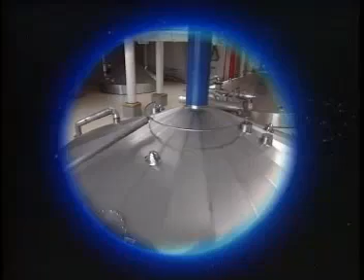Around the world, in countless demanding applications, users are discovering the benefits of peristaltic pumping. So what is peristalsis? It's an elegantly simple process designed for reliability by Mother Nature herself. In our own bodies, we use peristalsis to move food and drink through our throats and intestines.

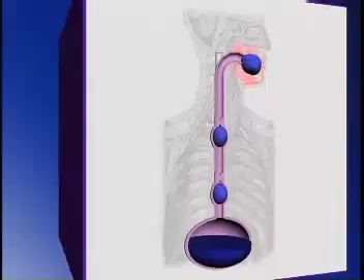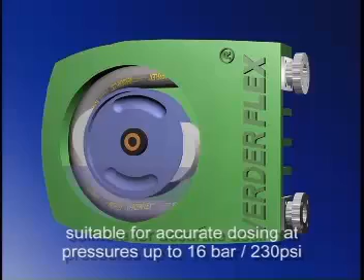Exactly the same process is used in Verderflex industrial hose pumps. An alternating wave of constriction and relaxation is used to force a slug of product along a smooth-walled flexible hose. The hose sits within the pump casing and is completely squeezed shut by the rotor or rotor shoes. This action moves the product along the hose at a constant rate of displacement without slip, making the pump suitable for accurate dosing applications and pressure ratings up to 16 bar or 230 pounds per square inch.

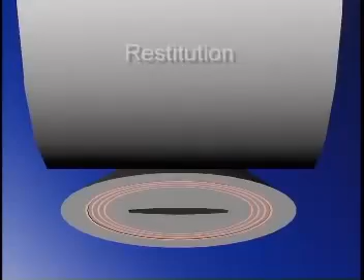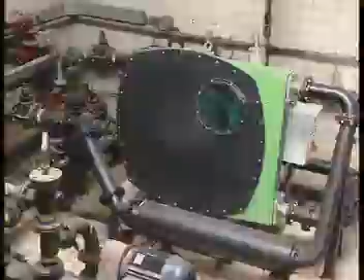After the shoe has passed, the hose returns to its original shape. This process is called restitution, and it produces an almost complete vacuum that draws the product into the hose. This approach makes a peristaltic pump ideally suited to pumping highly viscous products, liquids with high concentrations of solids, abrasive or highly corrosive and shear-sensitive products.

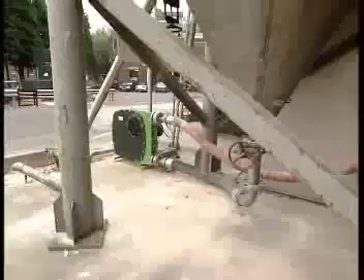The pump will self-prime and can even be run dry without damage. Applications often include deep lifts from vats or bund storage. In the event of a blockage in the pump, the direction of pumping can simply be reversed and the blockage cleared. One reason why we describe our pump as being a reliable problem-solving pump.

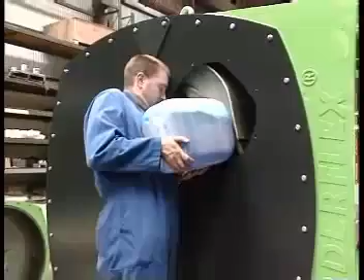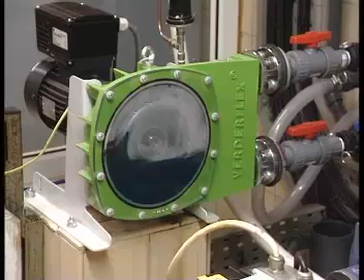The pump casing is partially filled with Verderlube lubricant, specially formulated to cool the pump and ensure long hose life. A major advantage of this design is that the Verderflex pump is fail-safe. Should product leak from the hose, it is still safely contained within the pump casing.

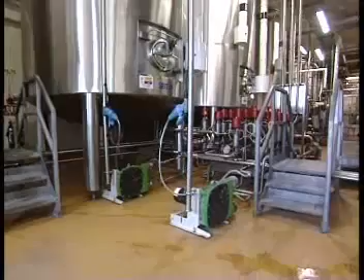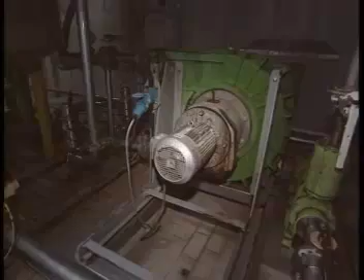Another advantage of the peristaltic principle are the low shear forces. This prevents damage to the product, and the gentle action even allows the pumping of live salmon parr in Norwegian fish farms. The volume of product pumped is determined by factors such as the bore size of the hose, the speed at which the pump is run, and the product's viscosity.

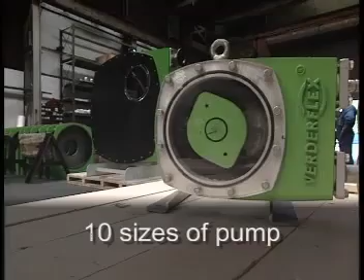The Verderflex range includes 10 sizes of pump, each one defined by the internal diameter of its hose. This ranges from 10 mm to 125 mm. Verder's largest peristaltic pump is the VF125 with a hose bore of 125 mm. When pumping water, this unit will deliver up to 80 cubic meters per hour or 350 US gallons per minute when running at a speed of 40 RPM.

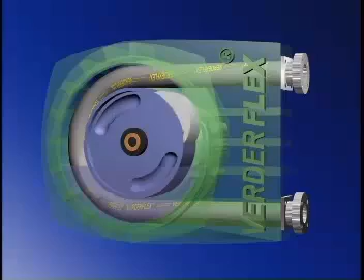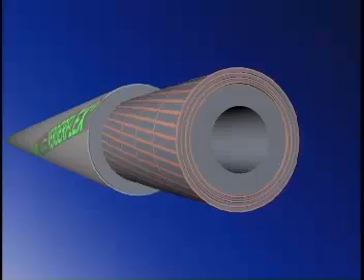Having looked at the operation of the Verderflex pump, you'll now understand the importance of the hose itself. Its design and construction has critical implications for the effective operation, life expectancy, and maintenance of the pump. Verderflex hoses are made up of 3 key elements: the liner, the fiber reinforcement layers, and the outer cover. Together, these key elements produce a hose with unique features that make a Verderflex pump the envy of the competition.

At the heart of the hose is the liner, specifically selected to suit the product being pumped. The external color-coded brand tape is different for each liner material, making identification easy. White indicates NR or natural rubber, ideal for abrasive slurries and inorganic products.

Yellow indicates NBR or nitrile rubber for oily and fatty products and organic materials. Red indicates EPDM, ideal for corrosive materials. Green indicates Hypalon for highly corrosive materials. And yellow and white brand tape identifies FDA-approved food-grade hose. In fact, there are more than 60 different combinations of hose bore and hose materials available from Verder to ensure that you're able to select the best available hose for your process or application.

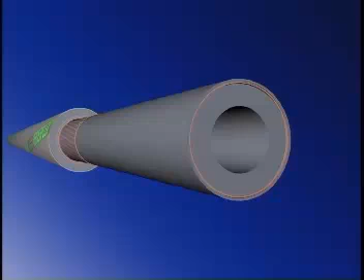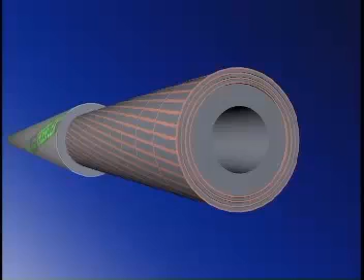After the liner comes the layers of fiber reinforcement. A Verderflex hose will always have at least 2 layers of fiber reinforcement. Hose diameters of 40 millimeters and above have at least 4 layers of fiber reinforcement. This reinforcement not only extends the fatigue life of the hose, but also allows it to self-prime. Lastly comes the outer cover, designed to withstand the abrasive wear of the pump rotor or rotor shoes.

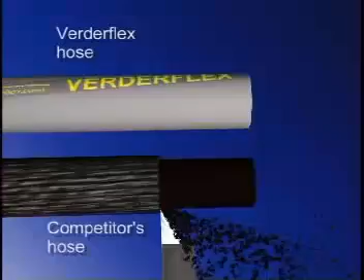Competitors' manufacturing techniques often involve making an oversized hose which is machined down to size to obtain the necessary tight tolerances. Verder's advanced production technique allows Verderflex hoses to be manufactured within tolerance, eliminating costly machining and resulting in a hose with extended operational life. An additional bonus is that the Verderflex process allows the hose cover to incorporate the color-coded brand tape, immediately identifying the hose liner material and pump manufacturer, giving our customers the confidence that they're being supplied with original quality spares.

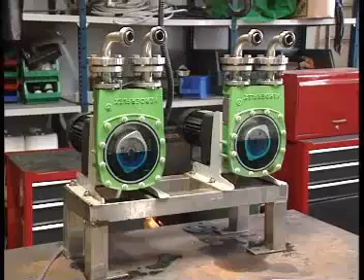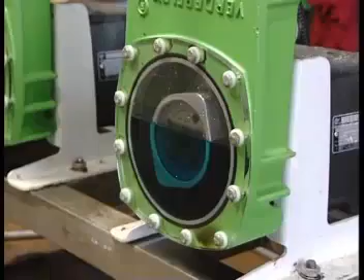So what about maintenance issues? This is another area where the Verderflex Peristaltic pump scores above the competitors. With no troublesome bearings or moving parts in contact with the product, reliable operational life is both extensive and predictable, reducing downtime to a minimum and allowing the adoption of reliable preventative maintenance schedules. A typical hose life of 2,000 hours can be achieved, depending upon specific process and duty requirements.

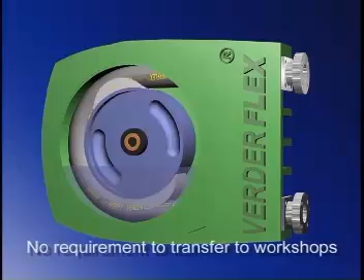There are no bearing alignment issues and no requirement to transfer the pump to workshops for maintenance. In the Verderflex pump, the only sacrificial parts are the hose and the lubricant, and both are easily replaced on site with no requirement for any special tools. Removal and refitting of the hose is quick and simple, again requiring no special tools.

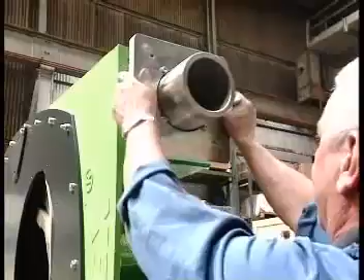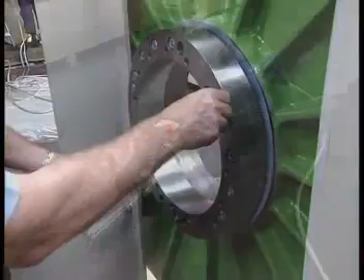And the same applies to the replacement of motor and gearbox. Adapter rings allow the Verderflex pump to be coupled to a wide variety of motors and gearboxes, giving users the advantage of using their preferred combinations and locally sourced replacements.

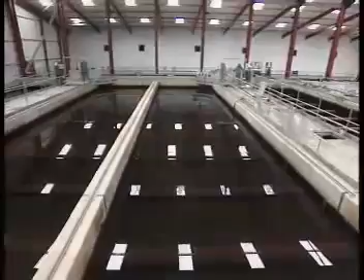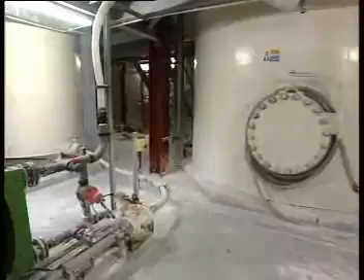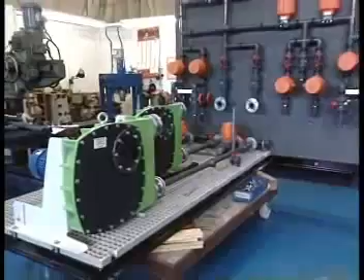The Verderflex pump is used in countless highly demanding applications. For example, it can be used as an accurate and repeatable dosing pump. In smaller pump sizes, our Genie portable dosing unit enables total dosing control. Verder provides a complete consultancy service, designing solutions to suit the most demanding applications. This skid-mounted system is typical of the larger dosing systems designed and built by Verder to meet individual customer requirements. With all these advantages, it's no surprise that Verder Peristaltic pumps can be found in a wide range of applications.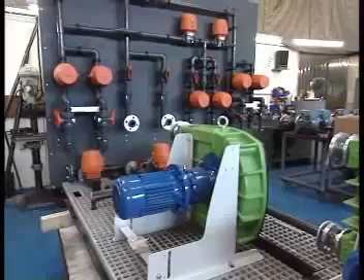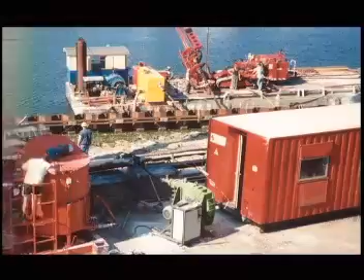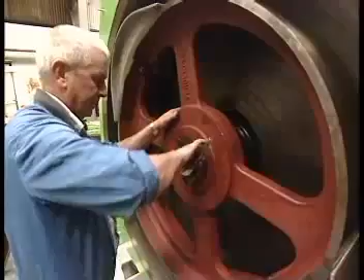As our customers will tell you, Verder not only supply the best solutions, they back them up with the highest levels of quality and service. Verder is accredited to the ISO 9001-2000 quality standard, and Verder pumps have been certified fully compliant in accordance with the world's most demanding standards.

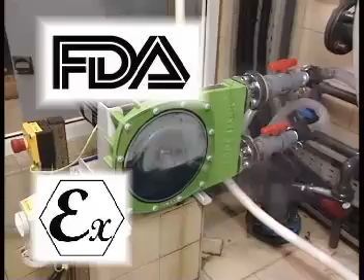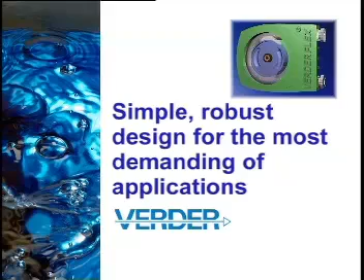In closing, let's review some of the advantages of the Verderflex Peristaltic pump. Reliability: a simple and robust design for the most demanding of applications. A self-priming pump that can be run dry. Low maintenance and no special tools required. Unique hose design with extended service life.

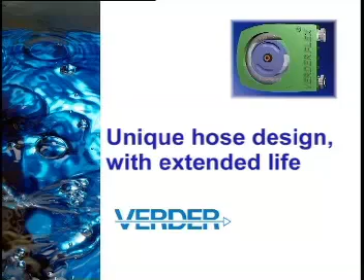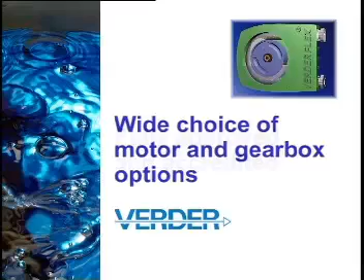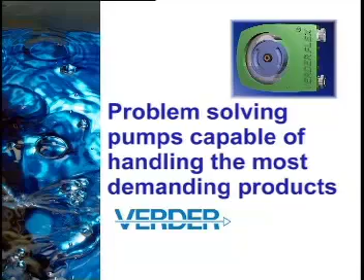No troublesome bearing alignment problems. Adapters that enable you to select your preferred supplier of motor and gearbox. The industry approvals and accreditations that our customers expect. Problem-solving pumps capable of handling abrasive, viscous, corrosive and shear-sensitive product. And as a result, the Verderflex pump has low lifetime costs in comparison to other pumps. The Verderflex Peristaltic pump, another world-beating product from Verder, providing solutions in pumping technology.